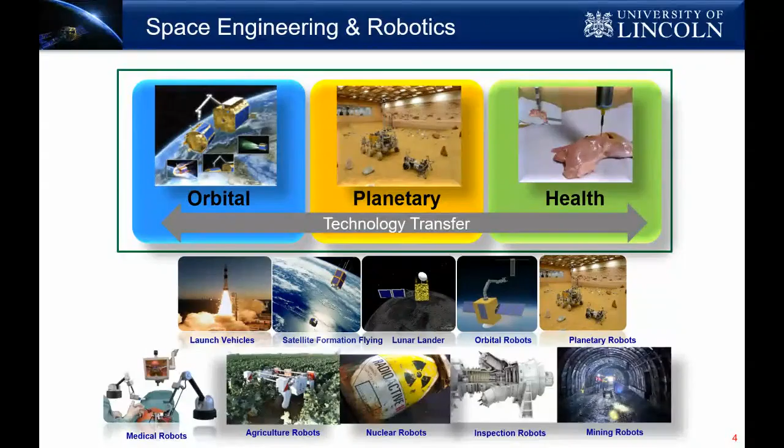So with that, I'm just going to introduce the first phase of my presentation, which is focused on orbital robotics research. By orbital robotics research, what we mean is this is to look at design of satellites with robotic manipulation capabilities. Or in other words, this could be conventional satellites, but they do have robotic arms. It could be a single robotic arm or multiple robotic arms. And these are meant for doing a lot of services in orbit. Today we are going to go through some of those applications of orbital robots.

Well, when I say I specialize in space robotics, I don't do everything because, again, based on my background as a control engineer, I try to specialize in automation and control of space systems, and obviously my focus is on space robots. So under orbital robotics, we work on a range of applications which looks at, say, for example, how we can service a faulty satellite in orbit.

Can we extend the lifetime of a satellite, a functional satellite that is approaching its end of mission? Can we repair a satellite? Can we refuel a satellite? Can we construct large structures like the ISS in orbit? And one of my focus is on assembling of space telescopes, modular space telescopes.

We are also interested in applying similar technologies for cleaning up of space, or in other words, active debris removal. So these are looking at, for example, how we can capture different types of debris. It could be a faulty spacecraft. It could be other types of debris floating around in the orbit.

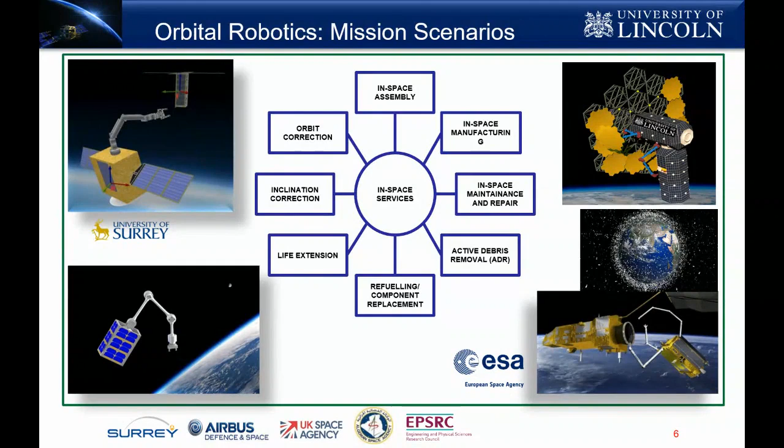So let me start off with some of the studies that we did in the past. Considering that this is not a technical conference, I will not be going into the details of the maths or any such technical discussions, but I'll try to keep it simple so that audience from different background who are attending or who are listening to me, you can follow me well. Now let's start off with looking at on-orbit servicing of satellites.

So when we talk about on-orbit servicing of satellites, here again, one of the vital component is a robot or a robotic arm. And of course, this robotic arm is mounted onto a spacecraft, which is a standard satellite. It could be large or it could be small. Unlike controlling a robotic manipulator on ground, it is very challenging to control a robotic manipulator in orbit. This is mainly because of the low gravity condition plus the complex dynamics that affects the motion of this spacecraft.

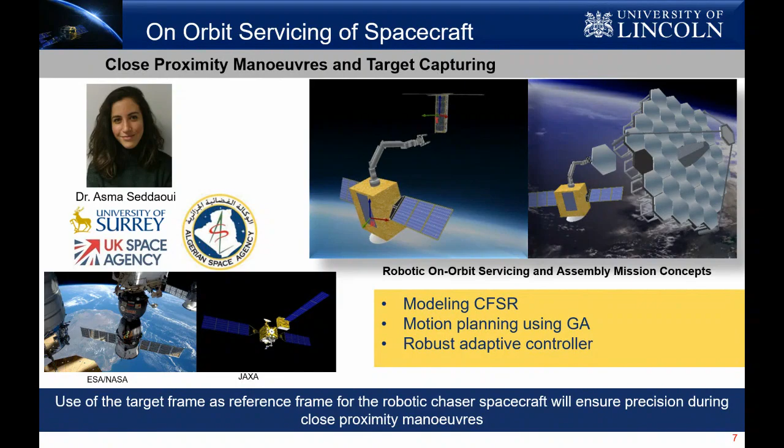So we work on various guidance, navigation, and control strategies, looking at how we can precisely maneuver a spacecraft in orbit and how we can safely capture and deorbit a target if it is a debris removal application, or undertake the repair operation needed if it is a servicing mission. So we work on a range of path planning and control solutions that can hopefully find its way to space in future missions.

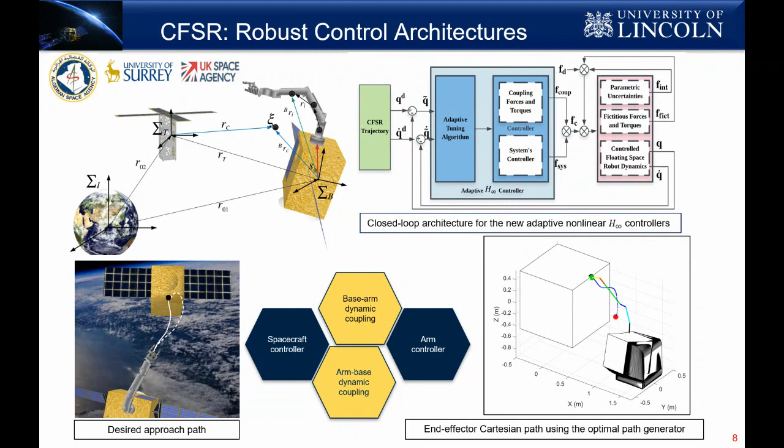I'm not going into the details of the programs or the algorithms that we develop, but I just want to show that there is a very intense level of mathematical modeling that goes into understanding the dynamics and control of a space robot. And it's very important that we as space engineers are able to understand the complex dynamics, and thereby we can develop clever or intelligent control algorithms that are needed for precise and safe operation of space robots. So this is one of the areas that we specialize in.

Similarly, we also look at system design. Say, for example, conventional satellites are pretty large, but of course there is also a growing interest in looking at the potential of small satellites to undertake such servicing or repair operations in orbit. You might wonder, if it's a small satellite, obviously it can't do much, unlike a large spacecraft. True, it's very true. So here we are looking at how small a small satellite can be.

And we started off looking at CubeSats. Obviously, CubeSats can't do much if it is a robotic mission, very true. But we could have multiple such smaller space robots working collaboratively to undertake certain operations. Similarly, we are looking at scenarios or mission concepts where, for example, two small space robots, each having a single manipulator, could actually dock together to become a larger spacecraft with a dual arm feature.

So these are some of the other aspects of systems engineering and system design or space robot design work that we are doing. So this is another very interesting area because I believe there's a future for smaller satellites and small space robots as well.

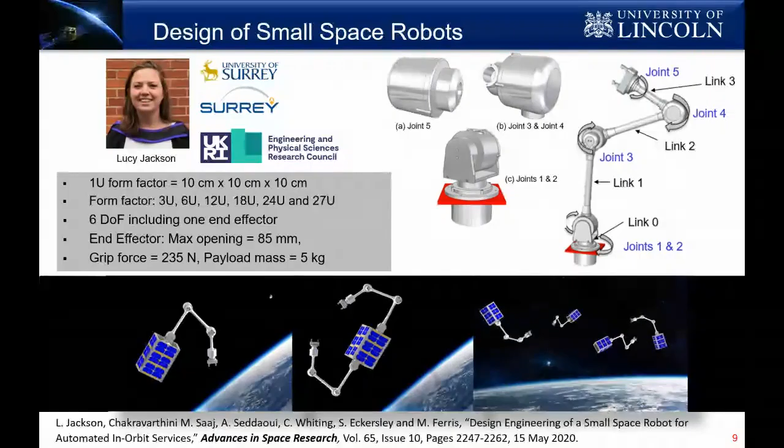Another very interesting application is the potential of in-space telescopes, or how we can actually assemble modular large aperture space telescopes in orbit. If you look at the very successful Hubble Space Telescope and the next generation, which is the James Webb Space Telescope due for launch later this year, if I'm right, you will see that the aperture of these space telescopes is very small compared to the advanced concepts that we are developing now. So we are looking into the future where we want to see the potential of constructing space telescopes with aperture more than 25 meters, 25 to 100 meters.

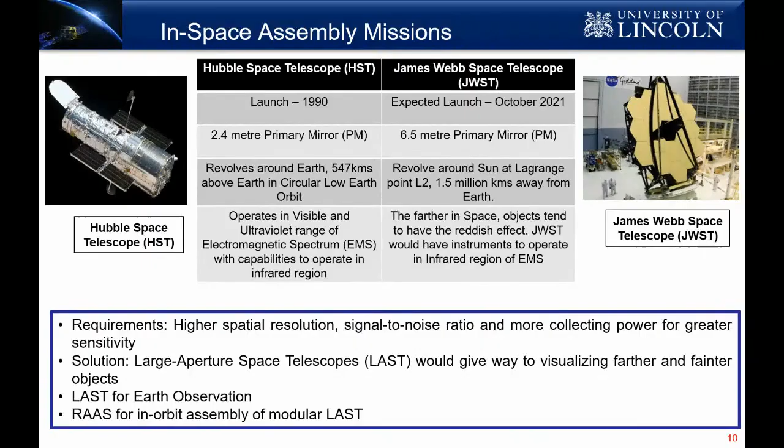How on earth are we going to do this in space? So this is a very challenging question for us, for everyone in the space community. And I can confidently say that there is a growing interest internationally to push robotics, automation, and AI solutions for such missions. And what we do in that context is actually looking at the robotic solution. So during my time at Surrey, I was able to work with Airbus and SSTL to develop the concept of an e-walker, which is an end-over-end walker.

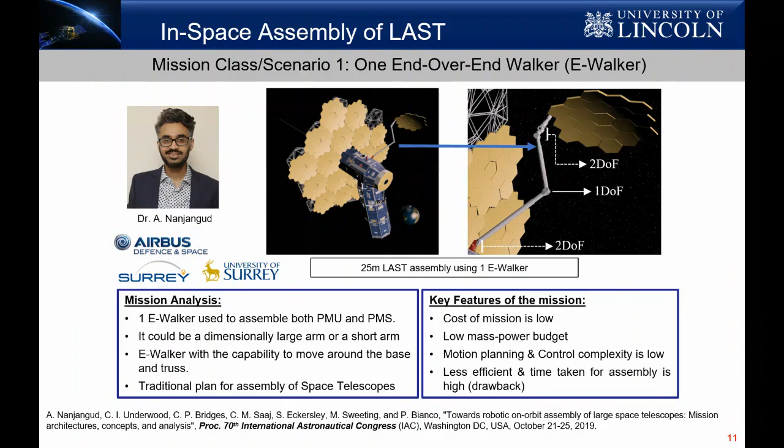So this is a slightly unconventional design compared to the standard robots or the robotic arms that have been successfully deployed in space. So this is a robot that can walk, but this is very different to a conventional walking rover or a robot that we use for planetary missions. So here, again, we are looking at the design, modeling, and control of the e-walker. And at present, we are focused more on developing the guidance, navigation, and control algorithms.

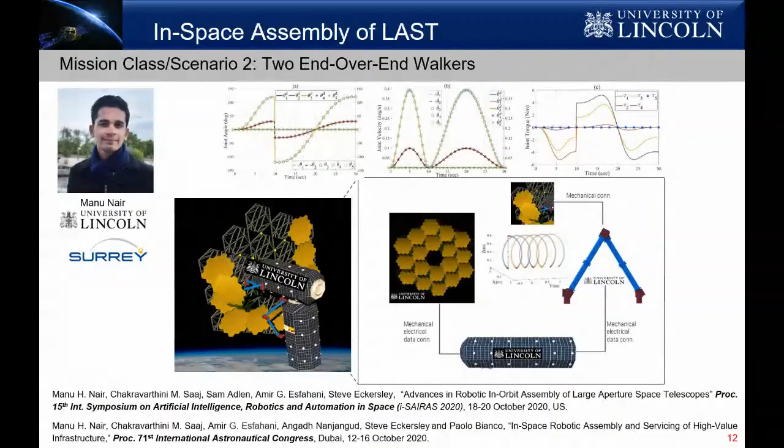And in Lincoln, we are trying to develop a scaled version of the e-walker. So hopefully, in a year or two, we will have a functional robot which we can then use for some of the Earth analog testing. We are working with SSTL, who is acting as an industrial advisor on this project. At the same time, we also interact with other stakeholders who are interested in this mission concept.

In the past, I have also had the chance to work with Airbus and several other companies on the application of model-based systems engineering, and of course one of the use cases or mission concepts that we focused on at that time was robotic servicing. So this was connected with the German DEOS mission. And then we also looked at active debris removal, where our focus was more on the power management system for a space robot.

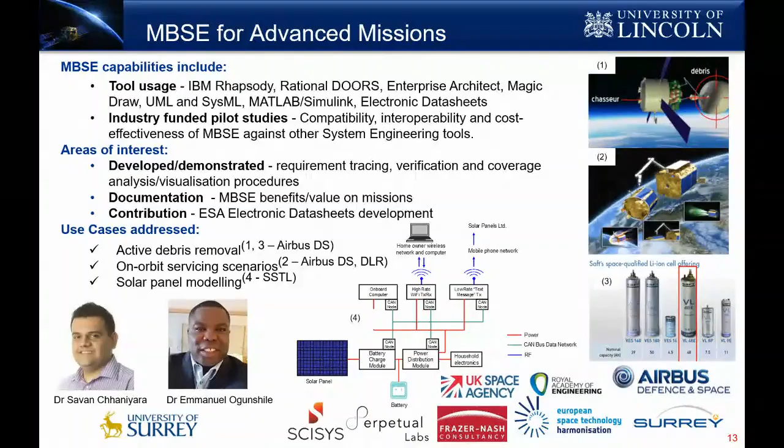We also looked at other potential uses of model-based systems engineering. So this is really moving from a paper-based approach to a model-driven approach, which will significantly improve the systems engineering capabilities of organizations. And we are very glad to say that Airbus and other companies are already investing heavily in MBSE solutions. Now we have a very interesting opportunity to apply this to another sector.

When it comes to space, one other area I'm interested in is applying additive manufacturing technology for orbital and lunar missions, mainly focused on in-situ resource utilization. This involves manufacturing techniques, and we are interested in exploring how robots can support such manufacturing operations in orbit or on the moon.

Now we are going to kick off a new study with our partners, Perpetual Labs, Carpenter, and Autodesk, looking at developing model-driven digital engineering solutions to make manufacturing smarter. If we succeed in this program, I'm pretty confident that we can apply such solutions for in-space manufacturing, which goes hand in hand with in-space assembly missions.

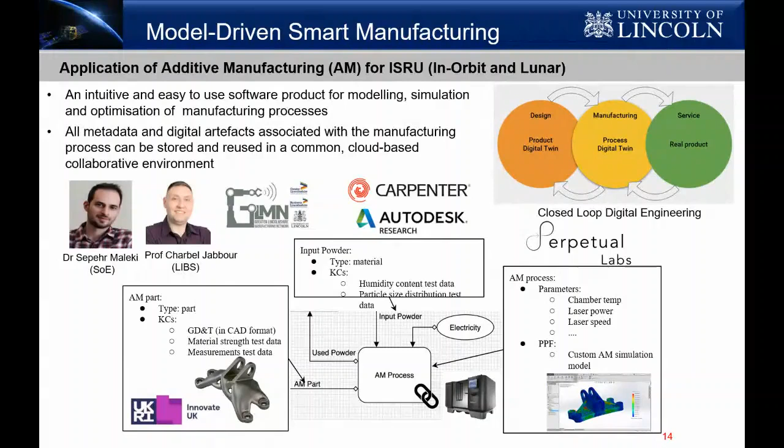So this is another exciting opportunity we are looking forward to, working with our industry partners as well as the Greater Lincolnshire Manufacturing Network.

We are also working very closely with the Satellite Applications Catapult and several industry stakeholders, primarily from the space sector, to develop in-orbit servicing and manufacturing programs. We are part of the UK Space IOSM working group, and we are working with all these industry partners, UK Space Agency and Innovate UK, to develop new mission activities focused on in-orbit servicing, assembly, and manufacturing.

This is different to the planetary robotics research or planetary robotic missions you might be more familiar with. This is a trend now, because we have realized there is a real need to enhance the capabilities of orbital missions through using advances in robotics, automation, and AI. If you look at ground-based application of these technologies, they are far ahead of what we are currently using in space, and there is huge potential for spin into space, and this is one other area I'm interested in.

So I hope with support of all these industry partners and funding agencies, we will be successful in having new programs focused on in-orbit servicing, assembly, and manufacturing missions.

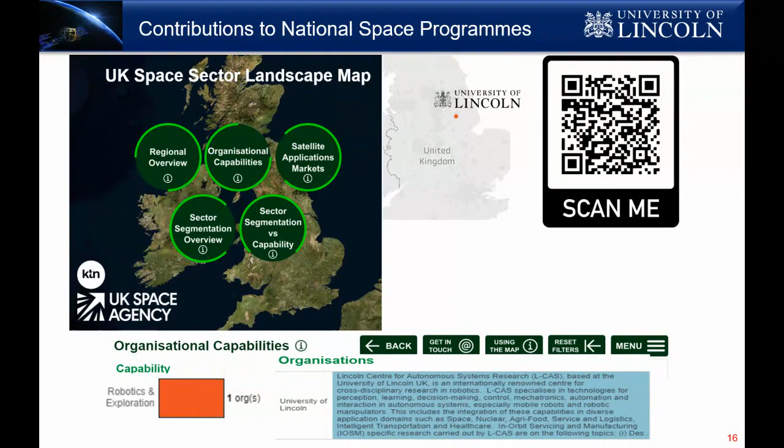I'm also coordinating another interesting initiative, which is to develop a space robotics technology hub through the Space Academic Network. This is really looking at the potential of growing UK's capabilities in planetary robotics as well as in-orbit robotics. I'm trying to pull together academics from different universities across the UK who can work together to develop our national space robotics programs in consultation with various industry stakeholders.

We are hoping that through interacting with the Space Universities Network, we will be able to reach out to many more universities who will be keen, I believe, to support this national program. So this is another initiative we are driving through Lincoln.

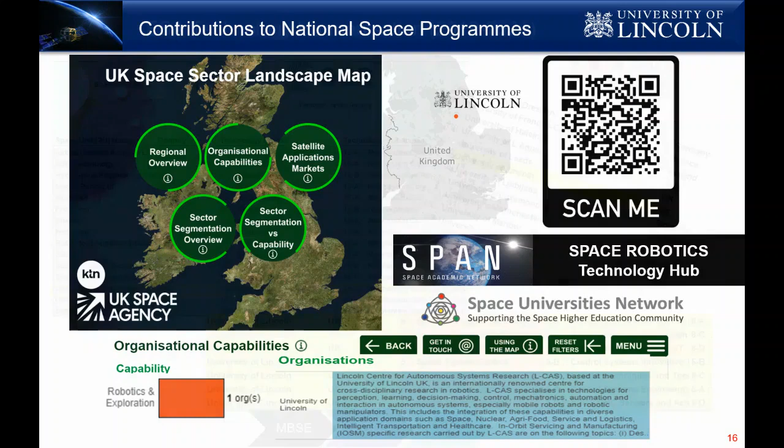When it comes to space research, it's important to make sure we are involved in ESA space programs, and we are contributing to various initiatives led by the European Space Agency. In recent years, we have been contributing to various technology harmonization programs jointly with the UK Space Agency and ESA. In particular, University of Lincoln has contributed to technology harmonization on model-based systems engineering, attitude and orbit control systems, and hold, deploy, and release mechanisms.

So there are quite different areas that we are contributing to the European space initiatives as well.

Internationally, I'm pleased to report that there are a lot of opportunities for us, and I have been part of organizing various large-scale robotics programs, for example, the European Robotics Forum, IEEE's flagship robotic conferences like ICRA and IROS. We are also working with various international experts from different agencies and, of course, academia as well, to develop programs or initiatives that will push the boundaries of space robots.

And we are establishing our contacts with the UAE Space Agency as well, and we are looking forward to supporting some of their new programs, which, of course, have been very successful in recent years in sending their spacecraft to orbit and now to Mars, which is great. So we are working with various international agencies to grow space research activities, and my interest is to drive space robotics missions nationally and internationally.

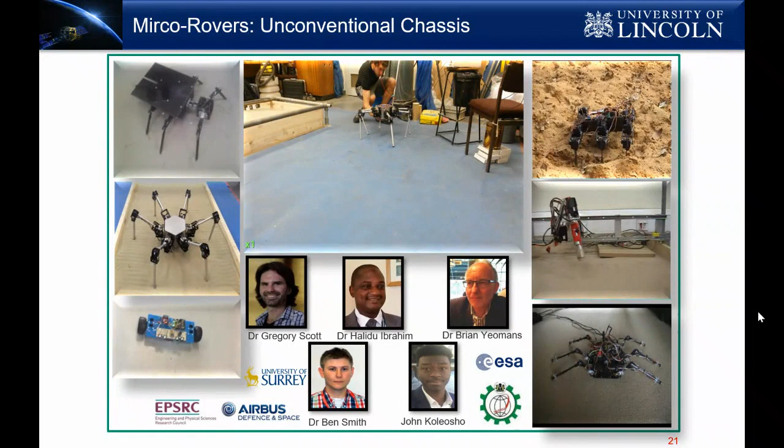And of course, when it comes to wheeled vehicles, one other area we are interested in is looking at monowheel and diwheel rovers. Again, this is not to completely replace a conventional large wheeled vehicle, but to really complement the operations of such large rovers. And if we are able to advance the technology of these systems, I'm pretty sure one day we will be able to fly multiple rovers, which will return more science data.

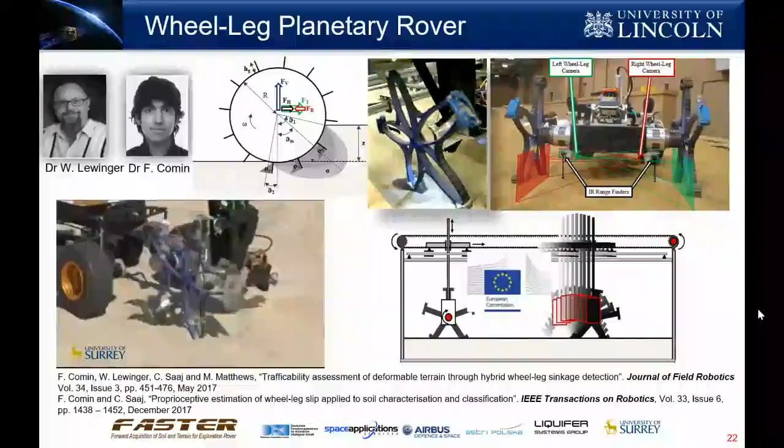We were also part of a study funded by the European Commission, and jointly with several partners from Europe, we were able to do the feasibility study of a Scout rover mission, which is very interesting because, as you can see in the video, this is a hybrid wheel-leg system. What we offered to this project from Surrey was a soil sensor, which was embedded within the hybrid wheels of this rover. This way, the rover can actually look at hidden dangers, such as deep crevices, well in advance of the primary rover navigating through the terrain.

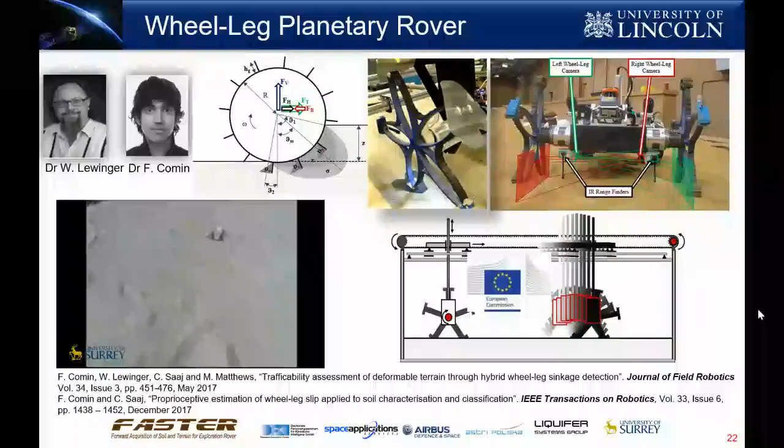I'm just going to run a very short video to give you a better idea about the EU FASTER project, and then we will move on to other topics.

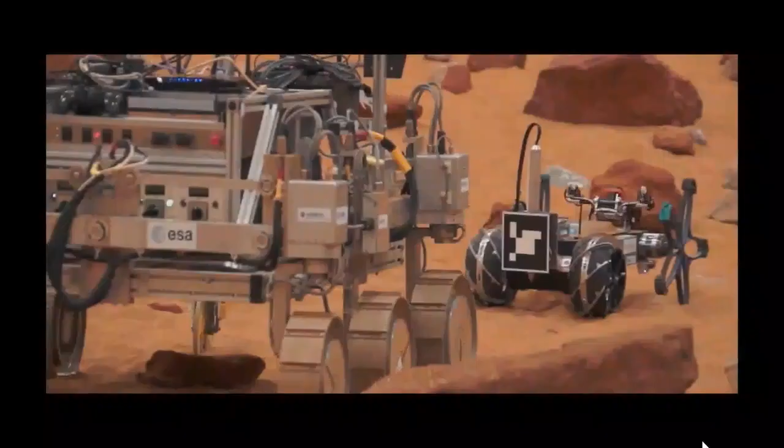A novel concept taken through the stages of prototype, design, fabrication, and analysis focuses on two rovers working in tandem and the communication between them.

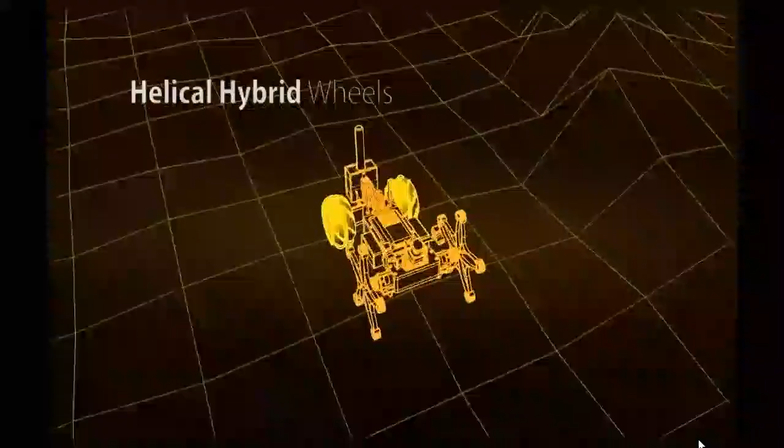Project FASTER advances the mission in a number of ways. To protect the primary rover from potentially hazardous terrain conditions, it is conceived that a smaller, more robust Scout rover can scope out conditions ahead of the primary rover. The Scout rover is capable of traversing both rocky terrain and soft surfaces through a hybrid wheel system.

If you're interested to learn more about this hybrid locomotion and the way two robots could work collaboratively, you'll find some very interesting videos on YouTube, which are much more lengthy and give you more details.

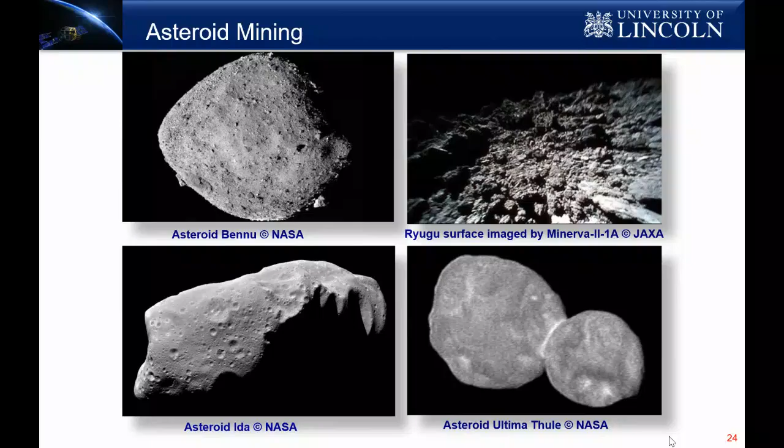Let's move on from planetary robotics to asteroid mining. How interesting is that? We know mining is a large business on Earth, with many companies heavily investing in it. But now more and more investors are coming forward to invest in robotic mining of asteroids, and one of the areas I'm working in is connected with asteroid mining.

This is a program jointly funded by Airbus and EPSRC, where we are looking at developing a self-reconfigurable undulating grasper. We call it SNUG. The philosophy of SNUG is very similar to what we see in nature.

For example, we know how a python would capture its prey, by encircling it. But we don't want to behave violently like a python, we don't want to crush our sample, which is very valuable. So what we are trying to develop is a robot that is modular in nature, which can virtually encircle its target and gently capture the sample.

When operating a robot in an asteroid environment, the gravity is very low, so it's very hard to operate or collect samples using a traditional robotic arm. It's like trying to capture a housefly with chopsticks, incredibly hard using traditional manipulators. We believe technology using virtual caging principles will be more appropriate for low-gravity operating conditions.

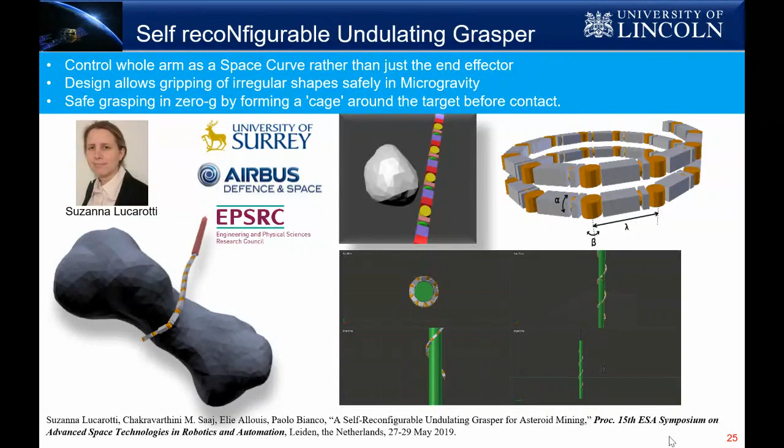Now we are at a stage where we are prototyping the different parts of this robot. Hopefully in another year or two, we will have a working platform.

Now let me say a few words about outreach and some of the activities I'm having with the student community. When I say I'm a space engineer, it's very important that I pass on my knowledge to the next generation of engineers or space engineers. For this reason, since 2005, I have been very active in outreach and public engagement programs, and to date I have addressed more than 10,000 students all across the UK.

This was initially facilitated by the National Space Centre in Leicester, and thereafter by the Royal Academy of Engineering, and many other societies, professional bodies, universities and schools who help and support such initiatives.

Even at the University of Lincoln, we recently formed our Student Space Society, and we are hopeful that once we return to campus post-COVID, we will again be supporting our students to take part in various competitions. So I'm looking forward to those brighter days again.

If we have students attending this presentation, I would encourage you to register for the upcoming Student Space Society National Student Space Conference. This is taking place next month, and it's a fantastic opportunity for students to interact with experts from the space community and also meet other students who have similar interests. So this is another upcoming opportunity for students.

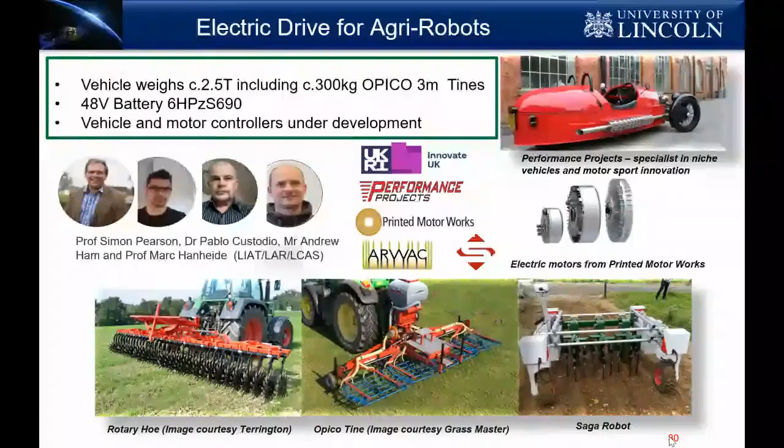Rather than changing the art of weeding, we are trying to enhance the technology so that we get better efficacy. This is another very interesting project that I'm now part of, and we are hoping that later this year we will have some nice results.

Looking at the application of robotic manipulators for farming. Here again, I have worked on rigid manipulators for space applications. Of course, for the space industry, we haven't yet proven the potential or the feasibility of soft robots. But we know that the soft robotics community is growing at a fast pace internationally.

When I came to Lincoln, I was quite amazed to see what is already going on in Lincoln in terms of soft robotic research for agricultural application. And I thought, why not support this initiative, looking at how some of the knowledge I gained in designing medical robots applies.

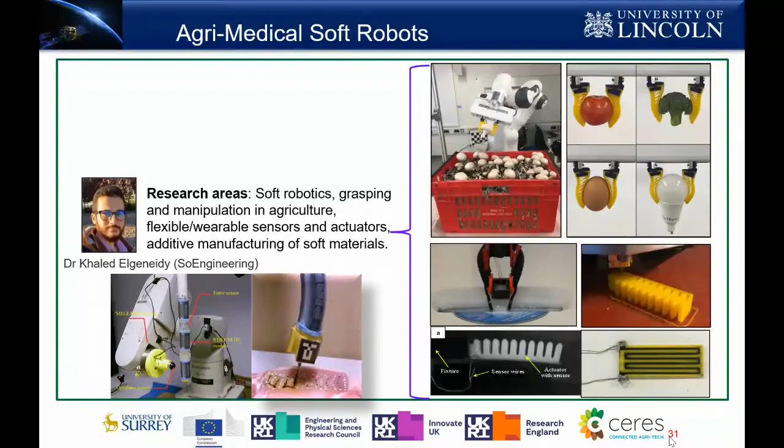There is a nice synergy in the soft robotic technology that connects medicine, or medical application or surgical procedures, with precision farming or precision harvesting. Now in Lincoln, we are trying to build a small group specializing in soft robotics.

Oh sorry, I forgot to tell you about my background in medical robotics. So let me just briefly tell you how I encountered a medical robot.

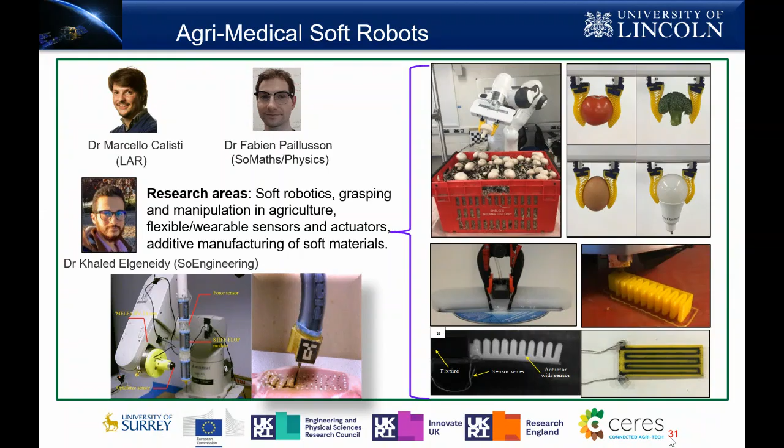Well, when it comes to medical robotics, my husband is my guru. He is a surgeon and a GP, so I learned a lot of basic things about surgery and human anatomy from him. With that information, I was able to interact with the clinical community and also other experts in the soft robotic community at various institutes internationally, to understand what are the driving principles of a soft robot, and what makes it different to the rigid robotic manipulators.

Of course, I'm sure you have heard about the Da Vinci robot, which is very popular, and there are many hospitals all across the world who have invested in the Da Vinci robot. As you can see, this is a bulky, rigid robot. Of course, they have a very high precision console through which the doctor or the surgeon can operate.

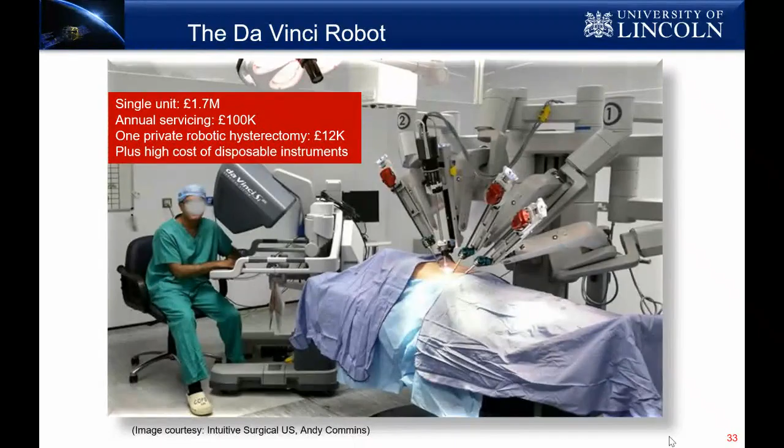However, it doesn't offer the feature of haptics, or in other words, the surgeon doesn't have a feel of what he's doing. So everything is visually aided. Unfortunately, this is a very expensive system, and especially in the UK with NHS, it will be very hard to invest or to procure these systems. So if that's the case, how can this become a standard platform in other countries?

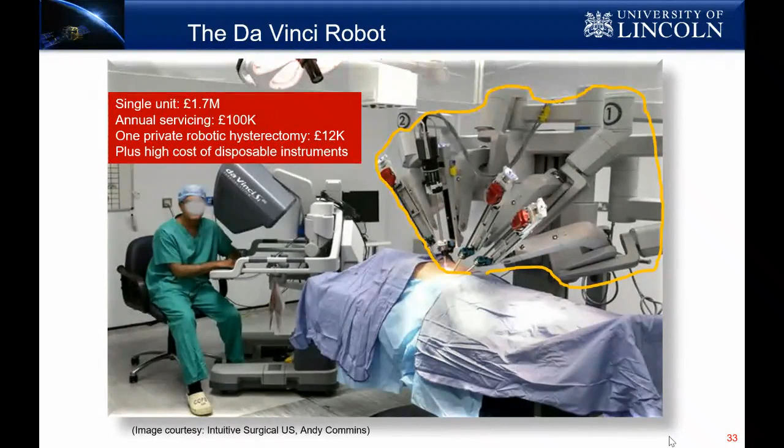So there is a need to look at other alternatives to the Da Vinci. Of course, there are companies who are now looking at rigid robotic technology which are much more modular, unlike Da Vinci, which is a single large bulky system. If you look at CMR Surgical's modular robot, of course it is modular, which is great, but this is again a rigid system. So in terms of its design, this is very similar to an industrial robot, although it might have better sensing, which of course we do have in other industrial platforms as well.

So this is why I understand that the soft robotics community, which I'm part of, is heavily pushing the frontiers of soft robots for surgical and other applications, including agricultural operations.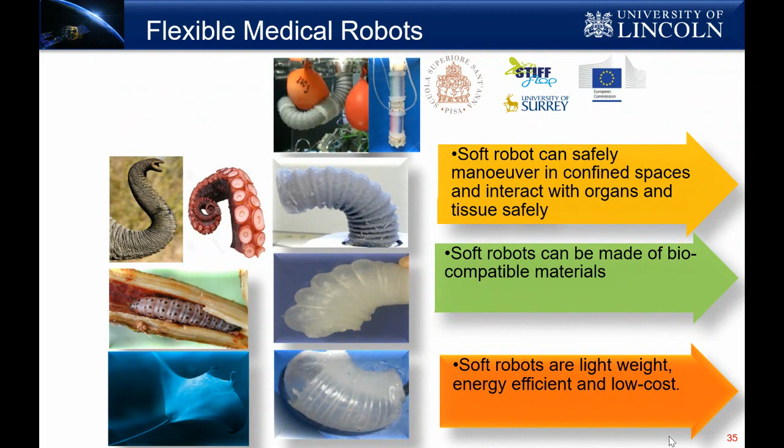So here again, as I said, there are very interesting lessons we can learn from nature which help us in designing soft robots. And we had the opportunity to work with various international partners on an EU-funded program that looked at developing a pneumatically actuated robot inspired by the octopus to do different types of abdominal procedures.

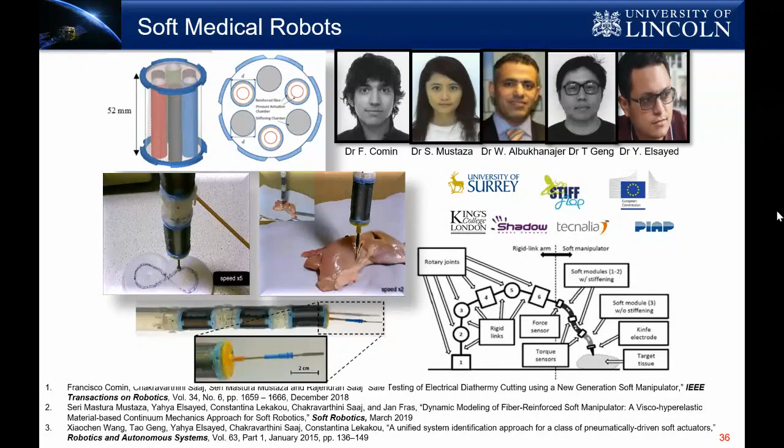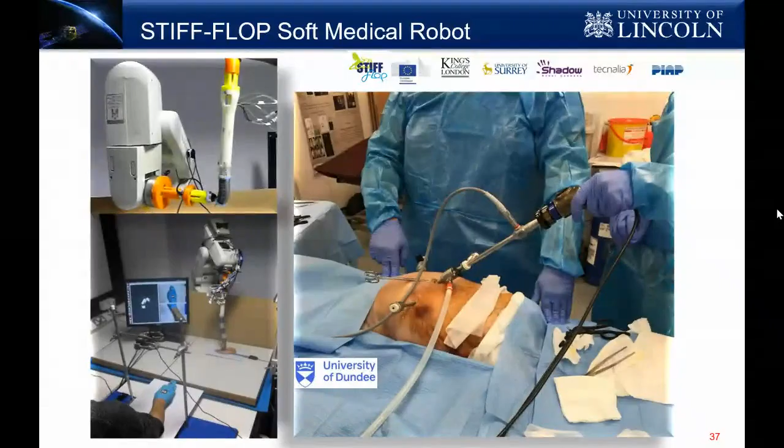So my team, we were able to demonstrate this jointly with other partners for ex vivo testing, and the STIFF-FLOP consortium managed to do the human cadaver testing in partnership with the University of Dundee and our clinical partners on board. So clearly there is a potential for soft robots because they can reach those parts within our human body that are otherwise inaccessible to a rigid robot or even a surgeon through open or laparoscopic procedures. So there is a future for soft robots in the medical sector.

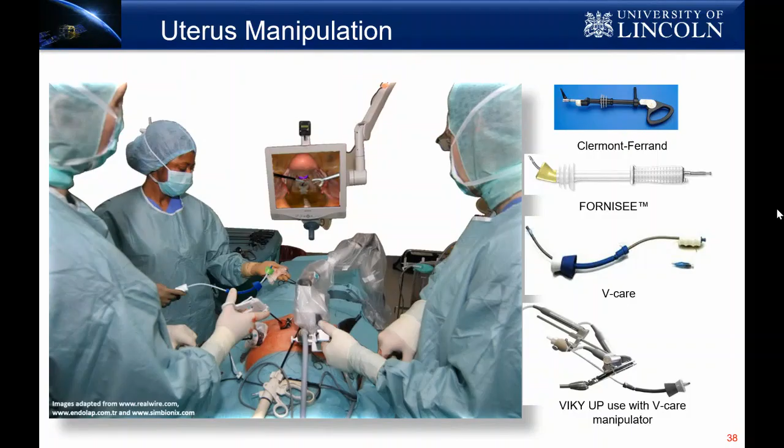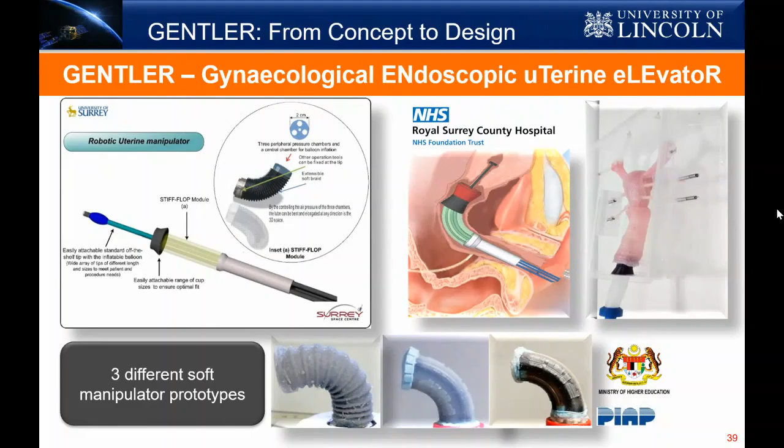And to me, it was also important to explore other clinical applications of soft robots. So I started working with the Royal Surrey County Hospital with the gynecological department, and we came up with the concept of a flexible uterine elevator, which can be used for a range of procedures such as hysterectomy and various procedures where they need to remove tumors from the uterus. So we are working with the clinical community in developing this concept further.

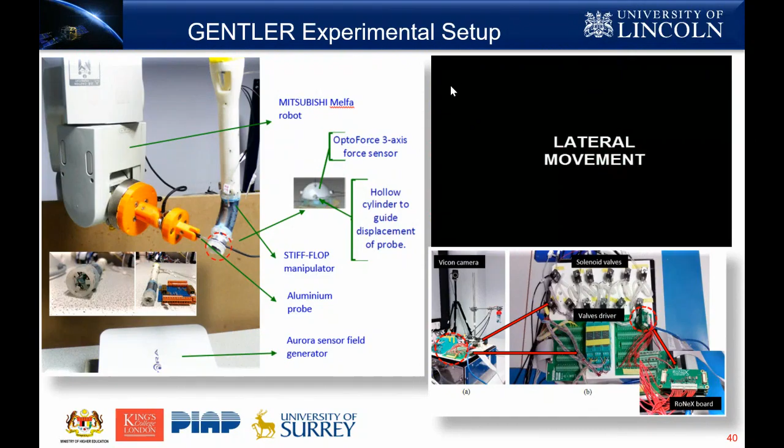We were able to do some preliminary testing for feasibility, but the biggest shortcoming of a soft robot is its limited payload capacity. So unlike rigid robots, whether for surgical applications, agricultural applications, or others, we want to develop or improve the technology readiness level of soft robots so that they can carry heavier loads. So this is one of the bottlenecks when it comes to soft robots. And of course, we are working towards developing other innovative mechanisms, hopefully, which will change the art. So in terms of future development, there's a lot more we can do.

And of course, all this will need funding. One other very interesting opportunity we now have, jointly with some partners based in Cambridge, is to develop this concept further and apply it to IVF. So when it comes to IVF, again, there are a lot of challenges, and we are exploring the potential of robotics and automation solutions to improve the quality of IVF.

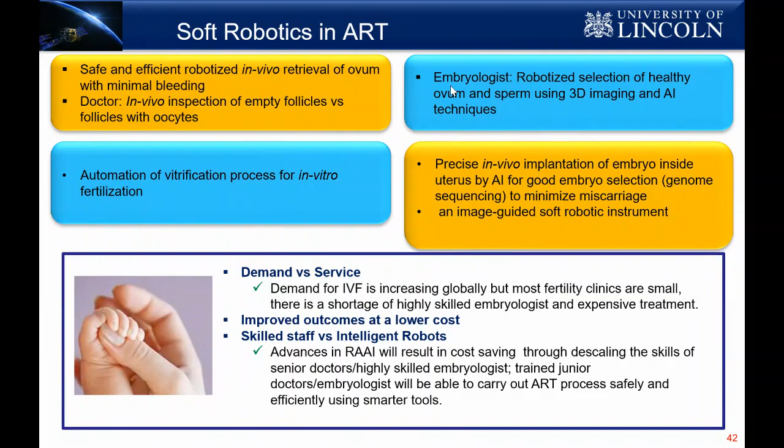Of course, I'm not going into the details, but there is clearly a market for this. And we are working with our partners to develop this concept further so that we can commercialize it. So for that reason, I'm not disclosing more, but it's very clear that if it is IVF, we cannot accept any errors. This is totally unacceptable. Therefore, it's important that we provide a very precise solution to the patients.

So we have our team on board, and we are working towards securing some funds to develop this concept further. Now I'm into my next adventure, which is interesting because this is really looking at how the concepts that we developed for medical robots, that's a flexible or the soft robotic manipulator, that technology can be applied to remote inspection and maintenance, or unmanned inspection and maintenance of industrial gas turbines.

So again, when I came to Lincoln, I was very pleased to see the large-scale Siemens facility on our campus. So again, I couldn't resist entering the lab and learning more about how complex these industrial machineries are. So we are really excited about developing this concept for internal inspection of gas turbines. And I'm looking forward to starting my post-COVID industrial secondment with Siemens.

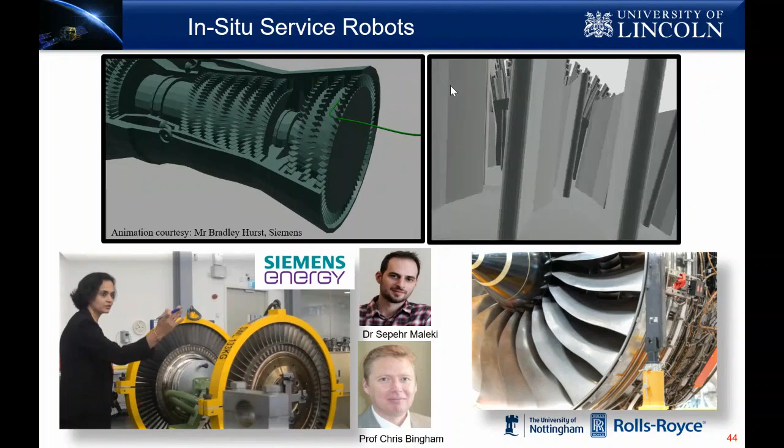Similar initiatives are already progressing at other companies like General Electric, and also University of Nottingham is developing similar technology for inspection of aero engines jointly with Rolls-Royce. Now, I must say a few words about the nuclear robotics research at the University of Lincoln. My colleagues Marc and Amir are overseeing the activities of the EPSRC NCNR Hub at Lincoln. Again, this is a large-scale national initiative which involves various other partners, and the University of Birmingham is leading this initiative. So as part of this NCNR program, they are doing quite a lot for the nuclear industry.

And interestingly, my interest here is to support our team in Lincoln, and of course our industrial collaborators, Veolia and faculty, through a new Innovate UK funded program that looks at developing a robot with a haptic teleoperation capability for sorting and segregating nuclear waste. So this is very nicely tied up with the ongoing activities within the NCNR Hub, and we are looking forward to kicking off this new project in the near future.

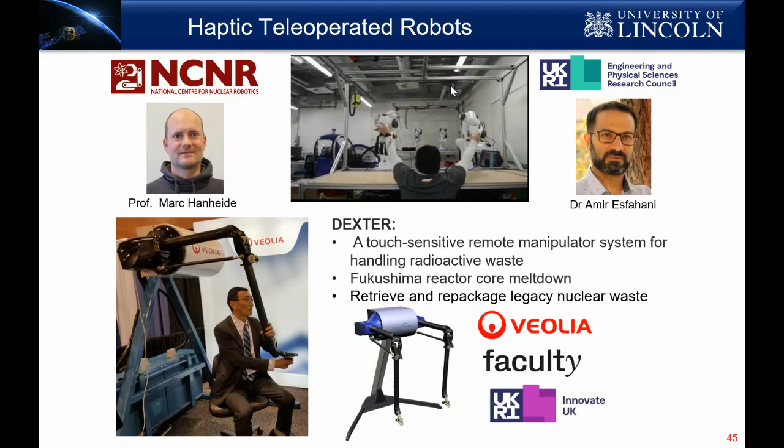So overall, I would like to say that being a space engineer, I have a lot of opportunities to work not only with space-based companies, but also with several other industries. And there is a huge potential for cross-sector technology transfer applications. So in conclusion, a career in space engineering actually opened up several opportunities for me. And my control engineering background allows me to work on a range of automation and robotic solutions for different businesses. And I will continue, of course, to support innovation in robotics and facilitate cross-sector technology transfer applications.

So hopefully this will help grow our regional capabilities in the East Midlands, and of course create new opportunities in Lincolnshire. So being part of a UK-led space robotic mission is indeed my dream, and I'm glad we are able to work with industry stakeholders and the UK Space Agency to develop our national space robotics programs. We will contribute to national and international programs as well.